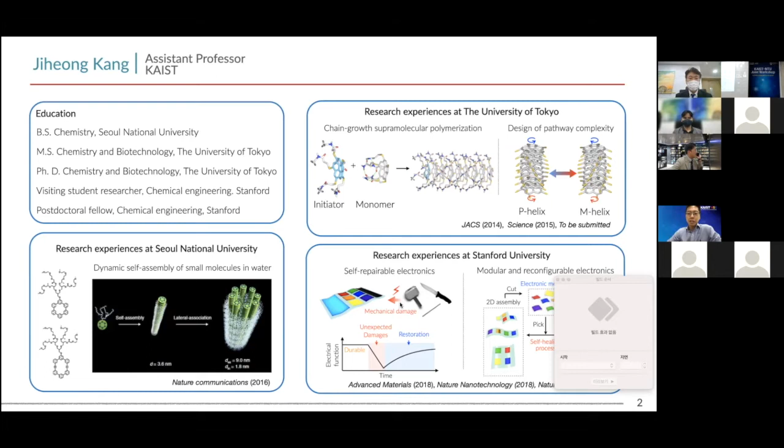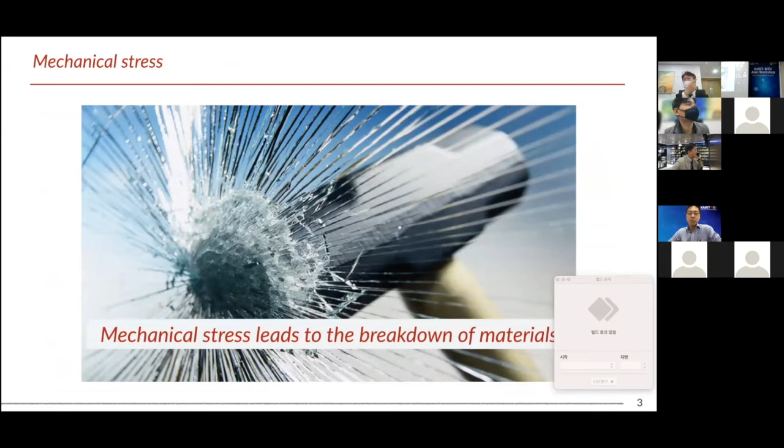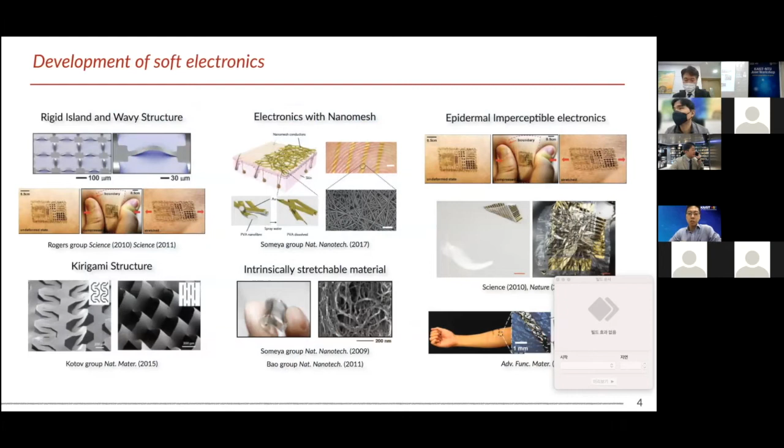Today I will focus on my work from Stanford University. My initial motivation there was how we can make materials with high resistance to mechanical stress. Basically, external mechanical stress is the origin of breakdown for materials or devices. So I was focused on soft electronics—how we can improve their durability and resistance to external mechanical stress.

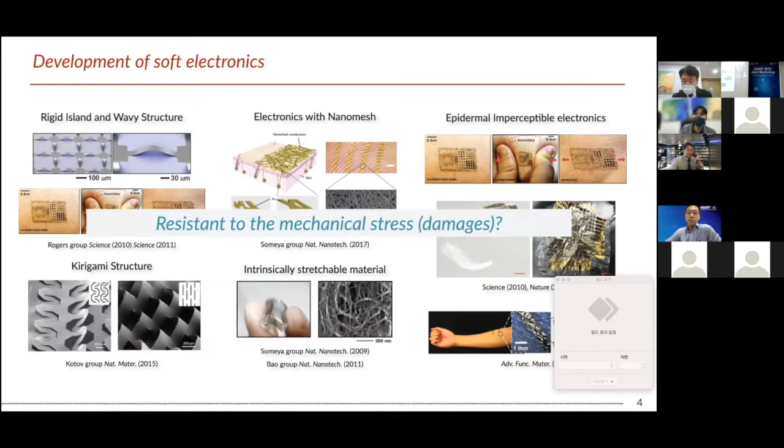There is so much work on how to develop soft electronics. However, considering their fabrication and approach, we cannot believe they can have high resistance to external mechanical stress. My motivation is how we can manage mechanical stress from external stimuli, so I wanted to develop self-healing materials to improve the durability and long-term stability of stretchable electronics.

Today my talk will focus on three topics. First is how we can fabricate self-healing elastomers, second is how we can fabricate self-healing conductive materials, and third is how we can apply these materials as interface materials for new opportunities in stretchable electronics.

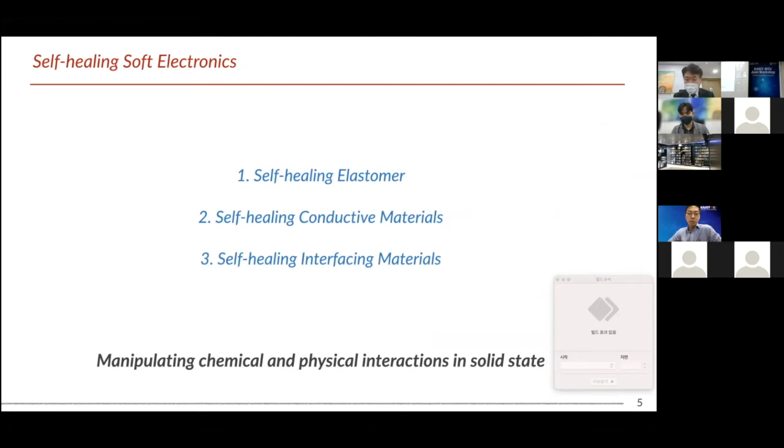So the first topic is the self-healing elastomer. First I would like to explain what self-healing materials are and what the challenge points are in self-healing materials.

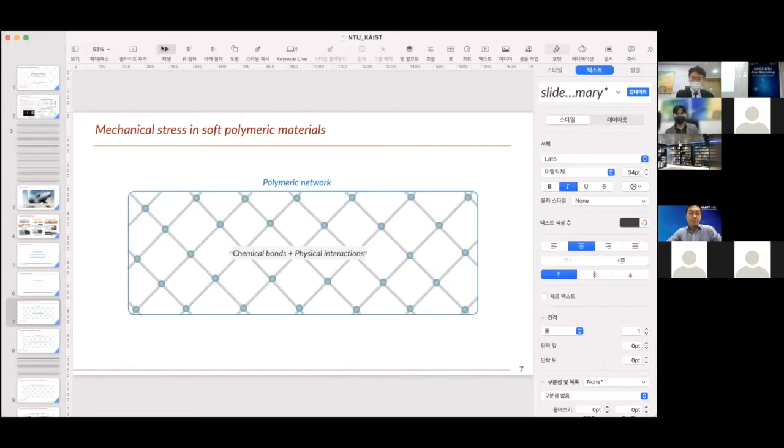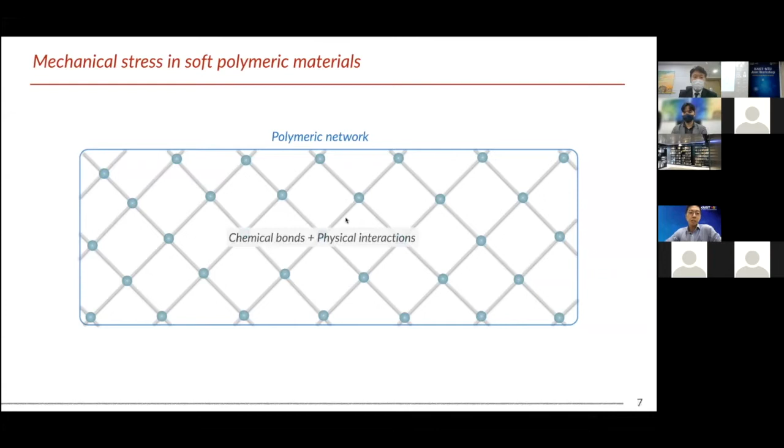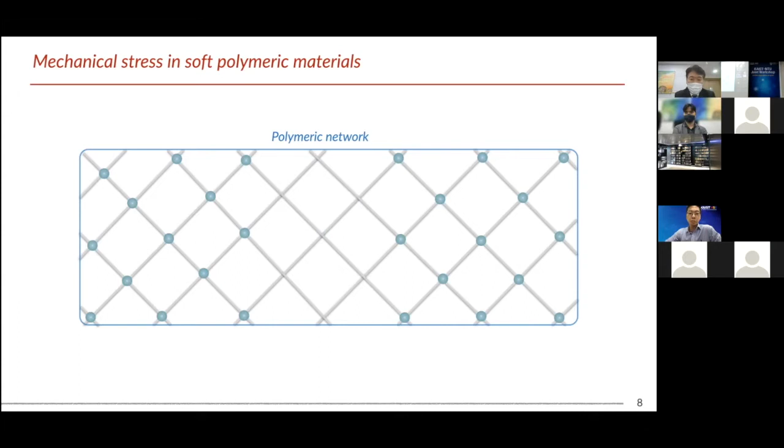Here is the most simplified polymer network for an elastomer. There's a flexible polymer chain, cross-linked by chemical bonds or physical interactions. If we apply mechanical stimuli or extreme stress, some bonds break or physical interactions are suppressed, and the material loses mechanical strength. In contrast, in a self-healing polymer network, even though we apply mechanical stress and some bonds break, they autonomously reform and can restore their mechanical properties. This is the basic principle of the self-healable polymer network.

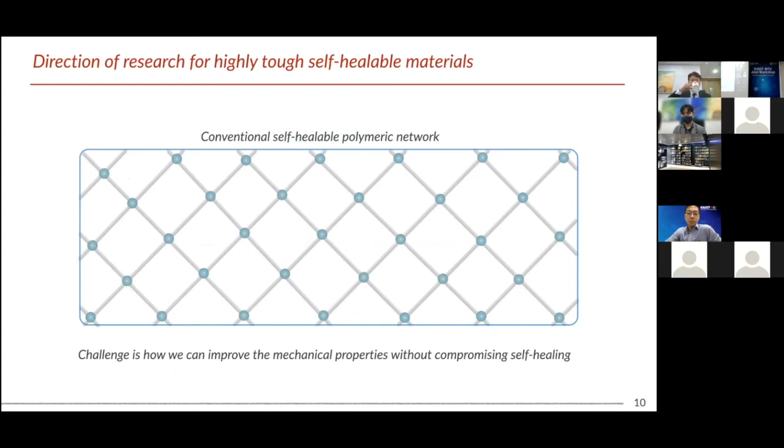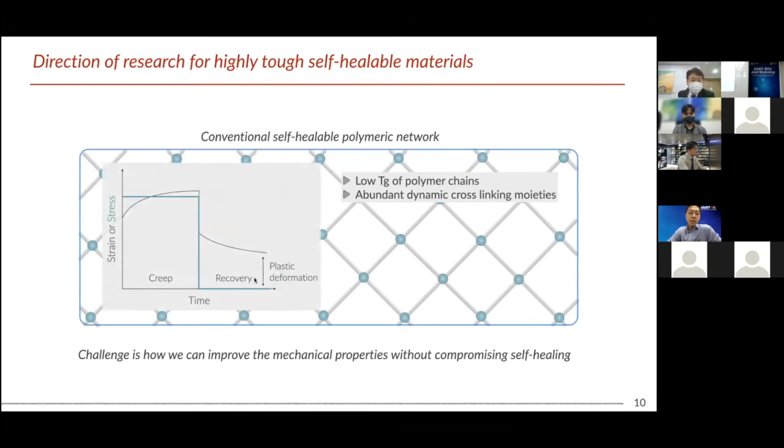However, the difficulty with self-healing materials is their poor mechanical properties, because they are based on a very low Tg polymer chain and rely solely on dynamic bonds. They conventionally show significant creep and plastic deformation under high strain. Simply speaking, they behave more like a gum rather than a fully elastic elastomer. We need to overcome this to apply them to stretchable or soft electronics.

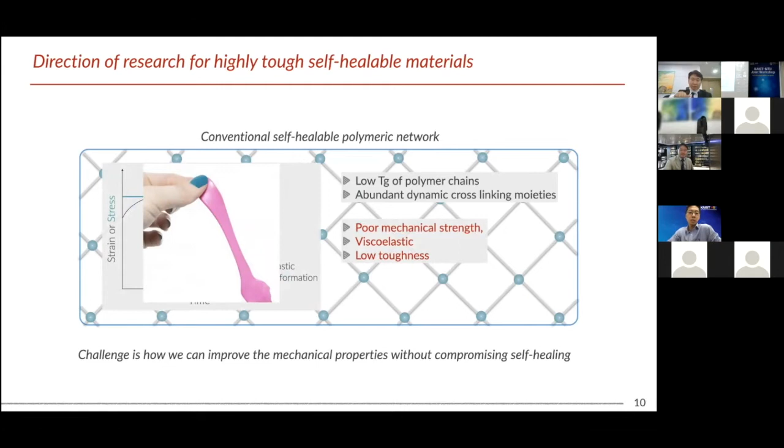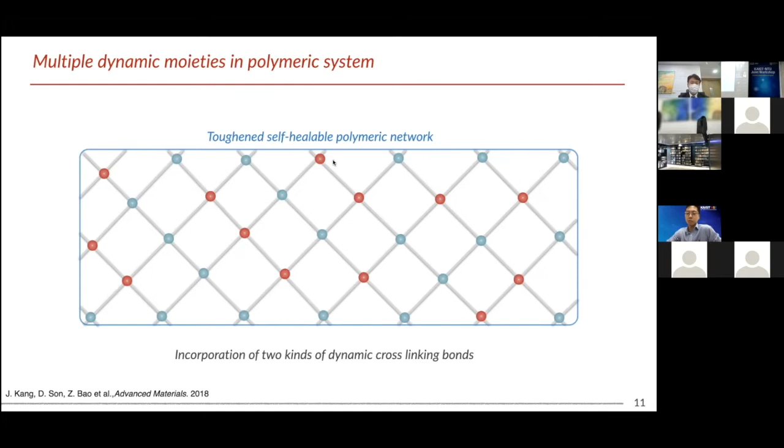My approach is quite simple. I imagined that if we could incorporate two kinds of bonds with different mechanical bond strengths, they could play independent roles—one a very strong bond to impart elasticity, and the other a weak bond providing fast energy dissipation to promote self-healing properties.

There are many dynamic bond systems for self-healing, but I mainly focused on hydrogen-bonding-based self-healing systems because they are simpler and allow easy synthesis of various types of molecules.

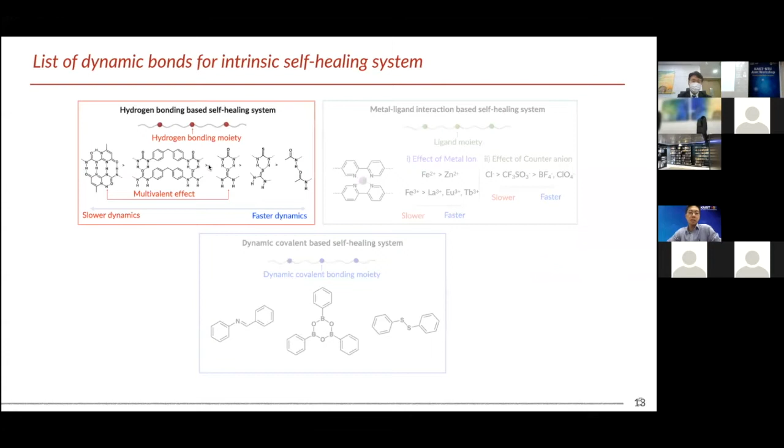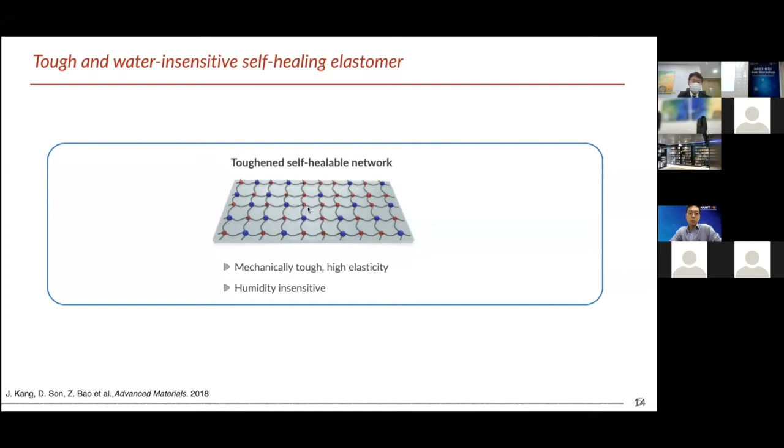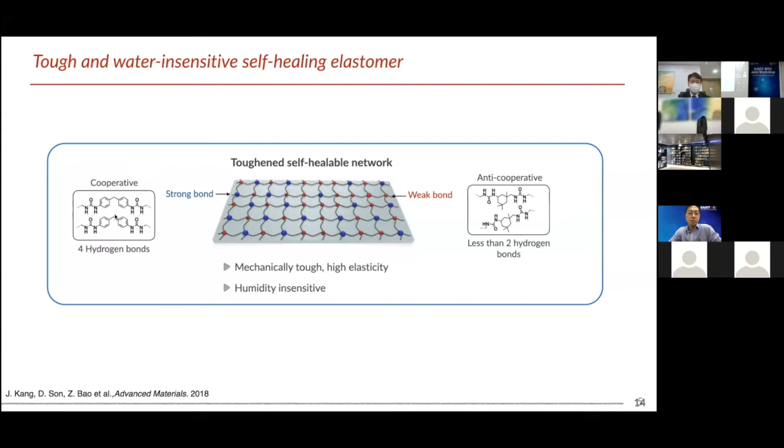My supramolecular self-healable polymer network is composed of two bonds: one strong and one weak. These bonds show very similar molecular structures—they both have two urea groups at the end, but differ in the center part of the molecular structure. The polymer design is based on a flexible PDMS polymer chain to impart low Tg, flexibility, and stretchability.

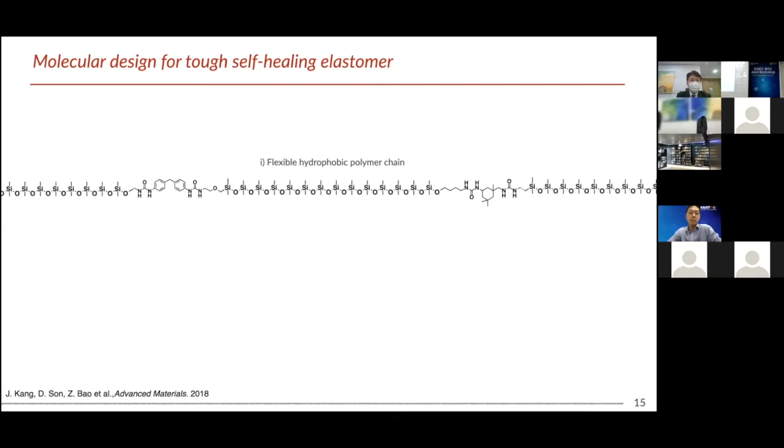So this is the first hydrogen unit here, with two urea groups. Because of their symmetric structure and the rigid structure of this center part, they can form four hydrogen bonds at the same time in a very cooperative manner.

On the other hand, this isophorone unit, because of its flipping effect and the steric hindrance of the methyl group, cannot form four hydrogen bonds at the same time. It follows more of an anti-cooperative hydrogen bonding interaction. Because of this different behavior in forming hydrogen bonds, they show very different bond strengths. Due to the multivalent effect, their bond strength differs by more than four times.

So then how can we imagine how they form such networks? In order to prove their structure, we performed NMR experiments and viscosity measurements. Actually, to make the film, first we need to dissolve the polymer in the solvent. At low concentration, they should be highly dispersed, with no particular physical interaction between polymer chains.

But we found that at a certain concentration, only the strong bond starts to form, while the weak bond remains highly dispersed. Based on this pre-crystalline structure, after full evaporation of the solvent, they eventually form a very interesting self-healable network with two kinds of bonds.

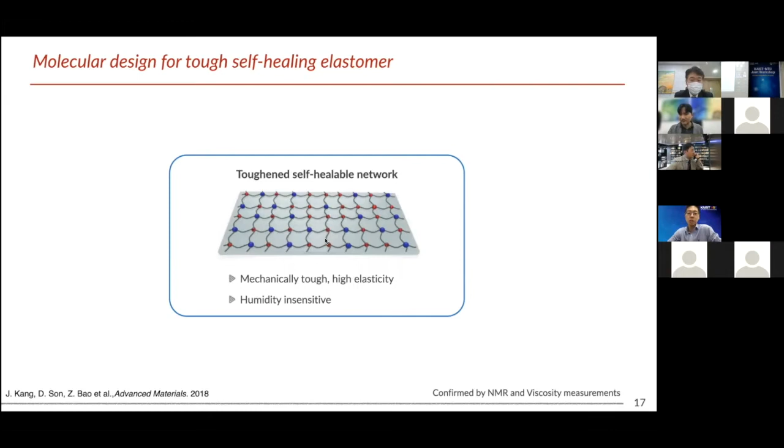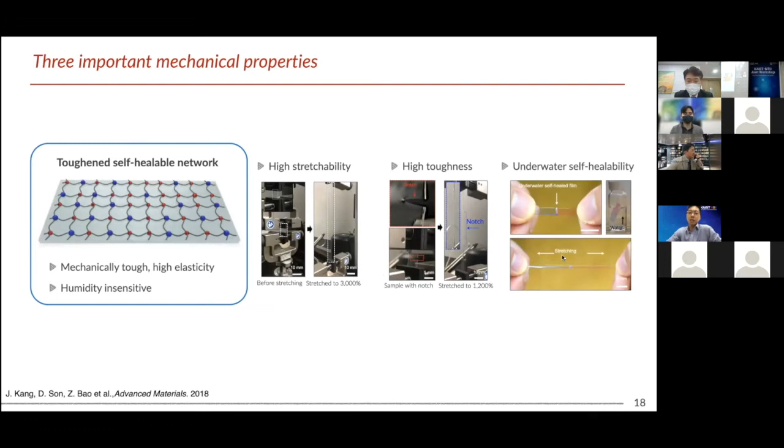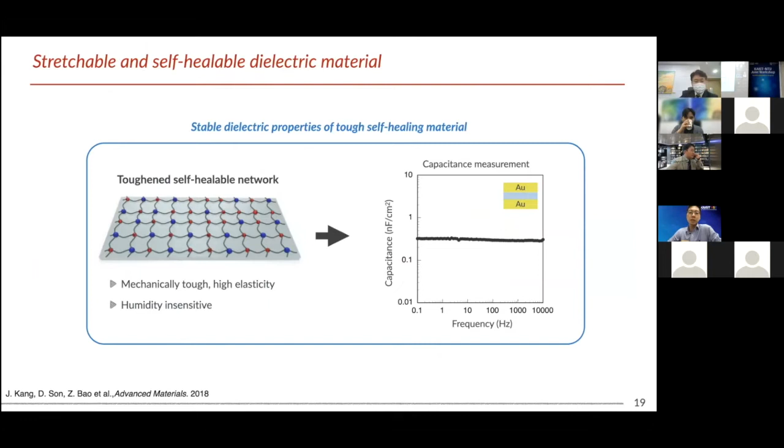This robust material also shows very nice dielectric properties, so they are ready for application in some electronic applications. Also, because of their fracture toughness, it is a very good carrier material for bioimplanted applications.

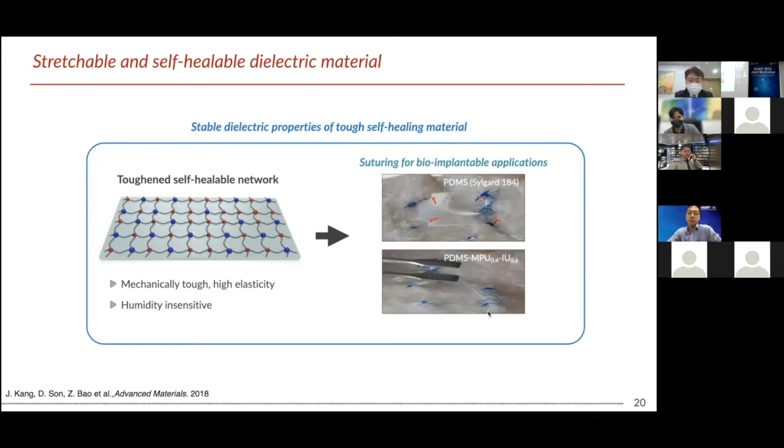If you want to implant electronic devices into tissue, it is inevitable to perform a suturing process. Most PDMS materials, because of low fracture toughness, break during suturing. However, due to the very nice fracture toughness of our materials, even under very harsh suturing processes, they can maintain their structure and keep nice mechanical properties.

So this is a summary of the first topic. I showed how we can toughen a conventional self-healable polymer network and achieve very nice mechanical properties.

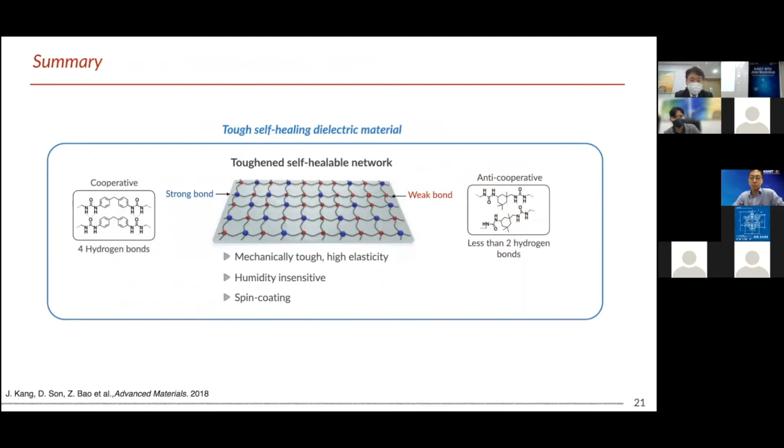Let me move to the second part. Before that, I would like to show some of our recent advances in self-healing materials. As you may know, most self-healing materials are based on non-covalent bonds, so they show very poor thermal stability.

But we found that if we can promote the self-assembly of such dynamic bonds, we can dramatically improve the temperature stability. Even with the same molecular design, by tuning the overall length of the polymer, we found we can promote fiber structure in the polymer film with dynamic bonds.

We found that even at 100 degrees Celsius, a relatively high temperature, this nanostructure can still be maintained and shows really nice mechanical properties.

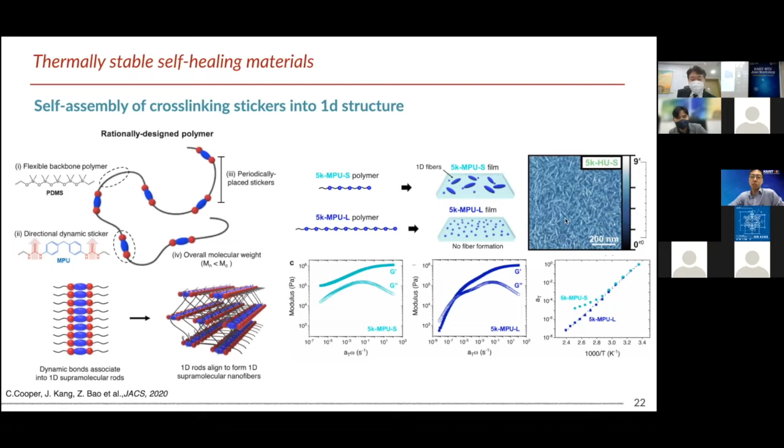So this is the fiber structure shown by AFM. As you can see, these dynamic cross-linkers start to form a very nice 1D structure and dramatically change their mechanical behaviors. We also recently developed a very nice actuator based on this supramolecular polymerization method.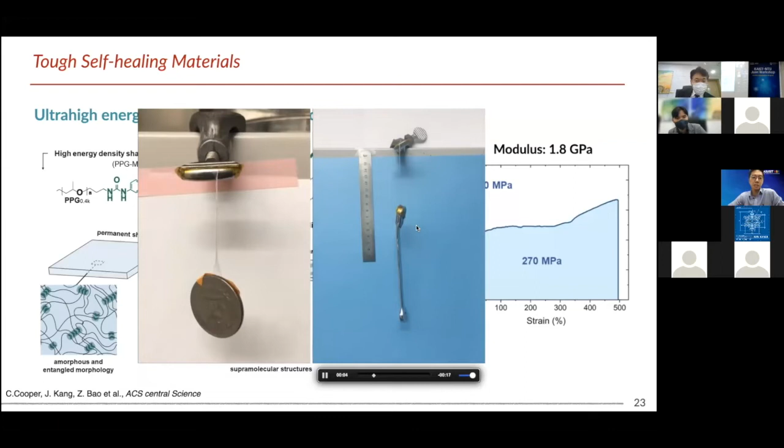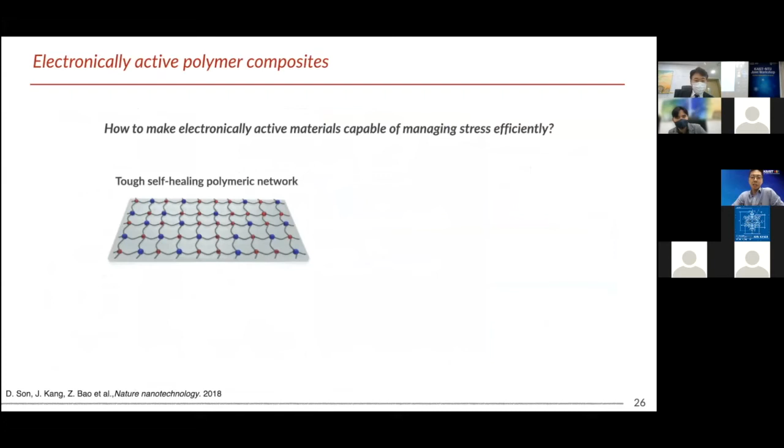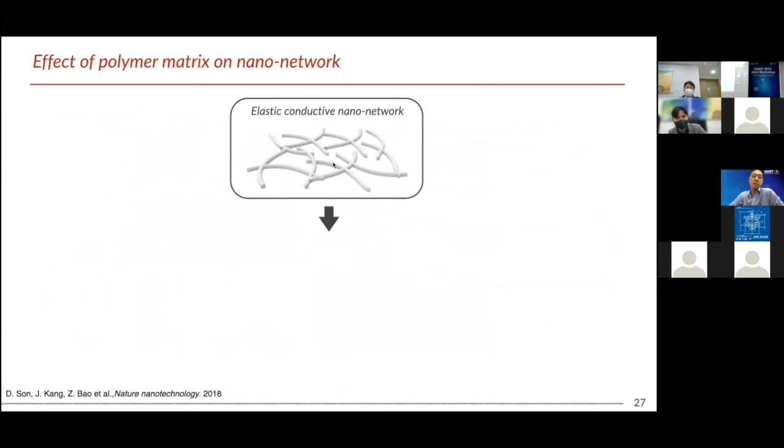So now I would like to move to the second part, about how we can make self-healing conductive materials. Basically, the easiest way to make a conductive material is to add a conductive component into the polymer matrix. Our initial motivation was curiosity about whether embedding this kind of 1D nanowire-based conductive nano network would change its behavior depending on the embedding polymer matrix.

We embedded this CNT or silver nanowire-based nano network into a fully cross-linked elastomer, a self-healable polymer matrix, and also a gum-like polymer matrix. We found, to our big surprise, that upon embedding this nano network into the self-healable polymer matrix...

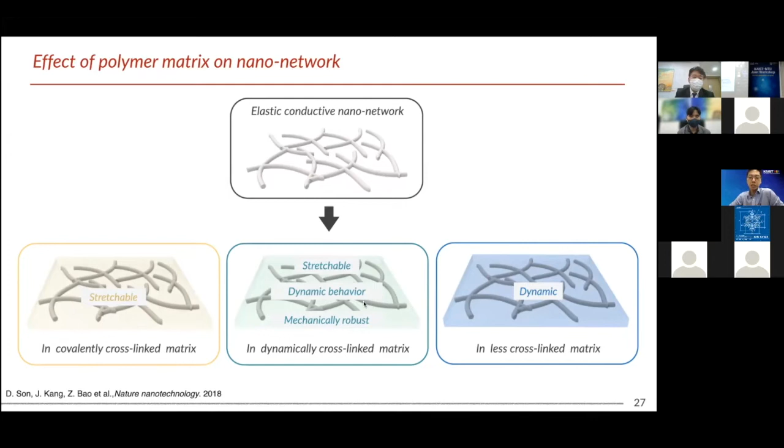...this nano network also started to have very dynamic properties, reconstructing itself under mechanical stress. So here's a video: we prepare the electrode and start to scratch it with a razor blade.

Initially, if you scratch with a very low power, there's no change in light intensity. So we start to increase the power of the scratch to fully damage the surface. At this moment it's very unstable, but they start to restore their bright intensity, meaning that they can reconstruct their network and restore the electrical properties.

To fully investigate what's happening here, we perform a more quantitative analysis. We measure the forces of the scratching, increasing up to 4 Newton.

After removing the razor blade, you can see the very rapid recovery of resistance at this first step. This is more related to the physical contact between the damaged surfaces. But more importantly, over time you can see a significant resistance decrease, meaning that they continuously reconstruct their nano network and restore their electrical properties.

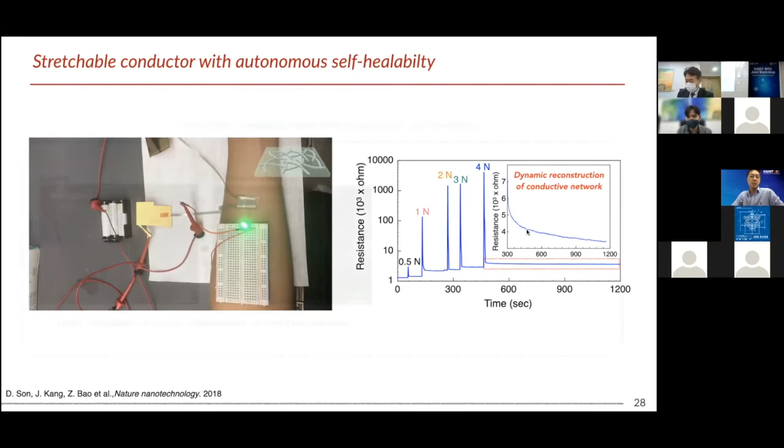To visualize what's happening here, we perform SEM measurement. Upon damage, initially because of their insulating properties, we couldn't visualize the nano network in this damaged area. But after 12 hours they start to reform the whole of the network and become very conductive. Then we start to visualize this damaged interface, meaning that they truly dynamically reconstruct their network over time.

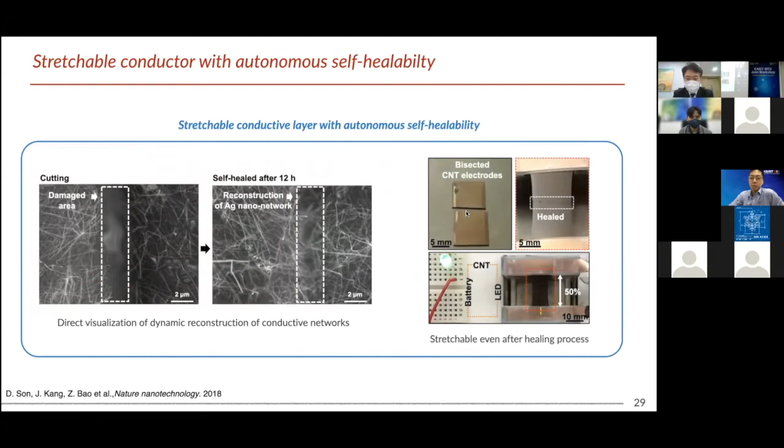And in order to confirm their mechanical healing, we fully cut the electrode and put it together. After 3 hours, we found that upon stretching, they can still maintain their mechanical properties and also their electrical properties as well.

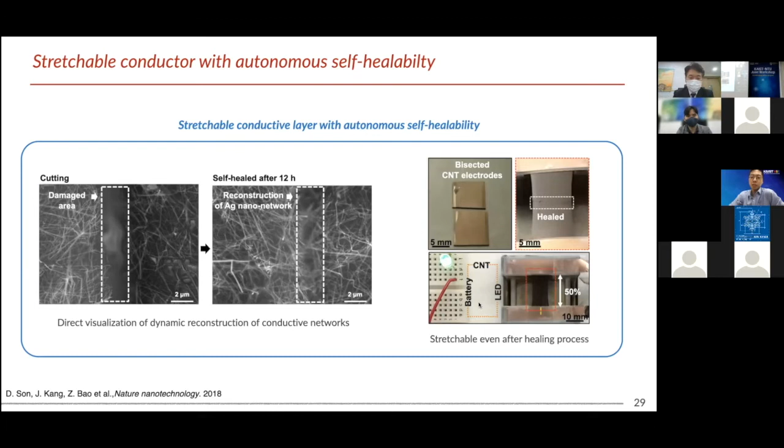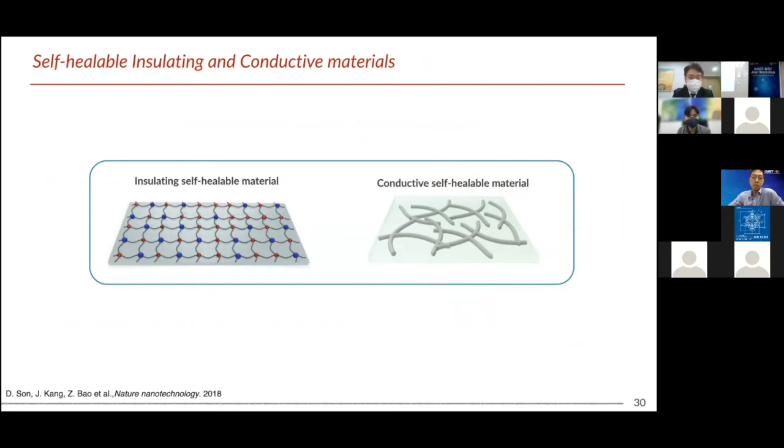So now we have a very nice insulating layer and also very nice conductive materials. And because of their mechanical robustness, we are able to fabricate this kind of integrated self-healable electronic skin with multifunctionalities.

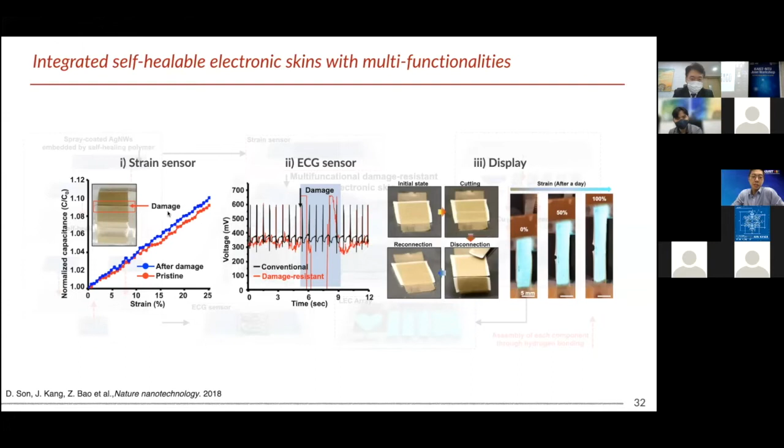They are composed of a strain sensor, an ECG sensor, and a display. All of the components are a fully self-healable system. So even after damage, they can restore the sensing ability and also their light emitting properties.

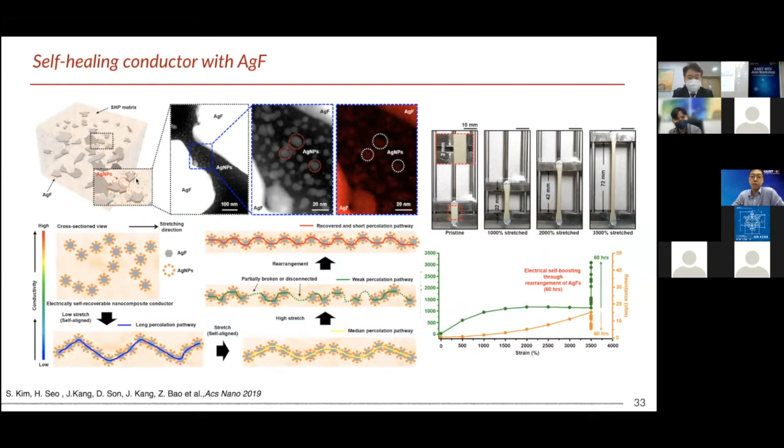This approach is not limited to 1D nano networks, so it can also apply to 2D systems. Even with silver flake systems, they show very dynamic behavior. We found a very interesting electrical self-boosting event inside the polymer matrix.

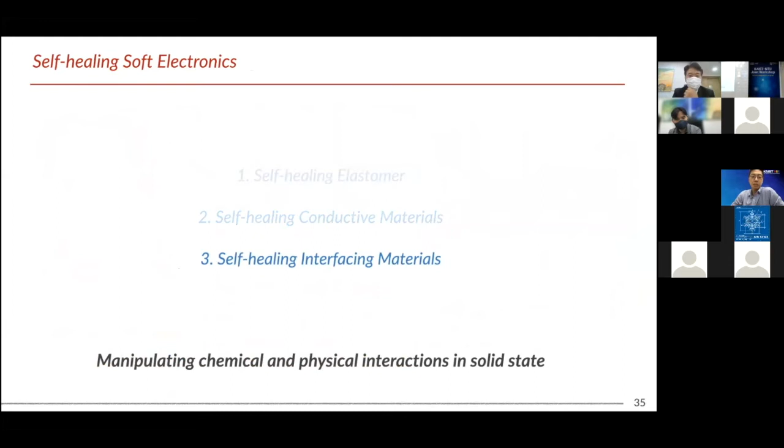Now I'd like to move to the last part, about how we can use self-healing materials in stretchable electronics as the interface materials.

Initially, my starting point is to make a stretchable semiconductor. Most semiconducting materials are quite brittle, even organic materials. Conjugated polymers have received great attention for stretchable semiconductors because of their semi-crystalline behaviors. But even with conjugated polymers, they easily show micro crack formation at 20% strain.

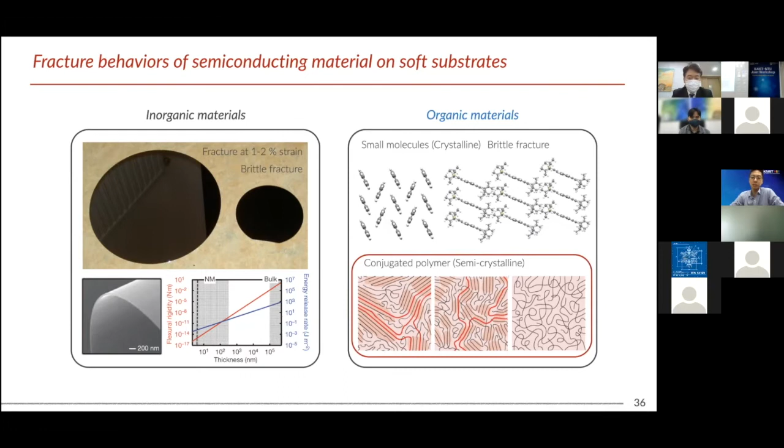So I would like to improve the stretchability of conjugated polymers in a different way. If you look at the fracture mechanics of polymer thin films, we need to consider two situations: one is a freestanding thin film, and the other is a thin film on an elastic substrate. In the case of the freestanding thin film, because of some stress localization effect, they easily form fracture at a very small strain.

But on the elastic substrate, the substrate can retard the stress localization effect. Somehow they can avoid complete fracture; instead, they form this kind of micro crack formation.

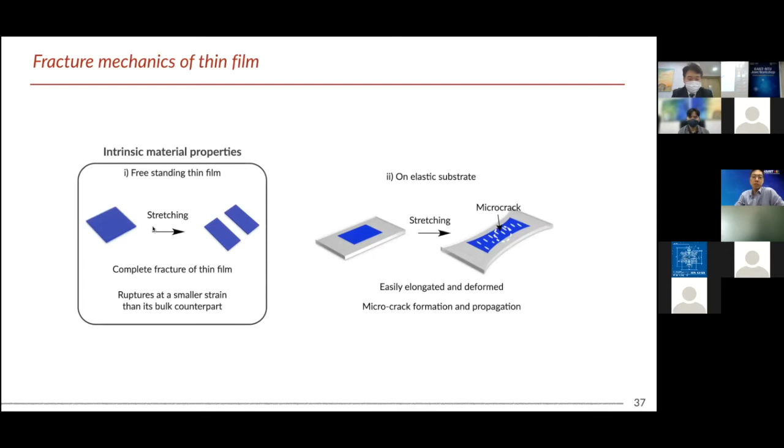In the freestanding situation, the behavior is more related to intrinsic material properties. However, on the elastic substrate, we need to consider the interface properties as well, so we need to consider both the material parameter and the interface parameter. However, most studies so far are more related to material properties engineering—by incorporating elastomer matrices, introducing conjugation breakers, introducing hydrogen bonding conjugation breakers, or making nano confinement effects inside the polymer matrix, they dramatically improve the stretchability of semiconducting materials.

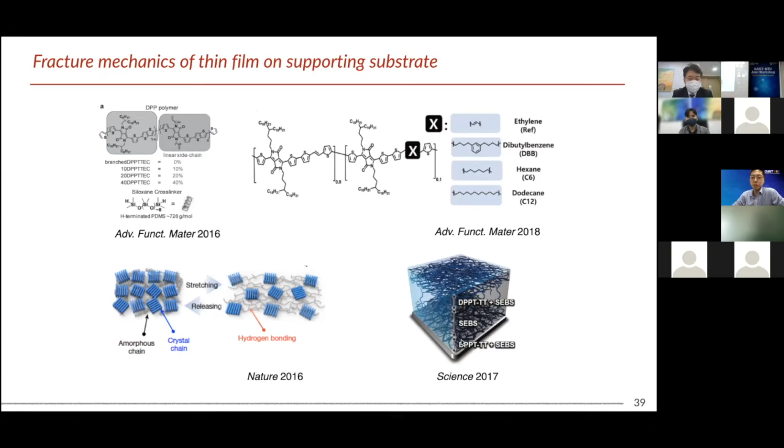However, so far there's no report about how we can engineer the interface and how it can affect the fracture mechanics behavior of semiconductor polymer thin films. So I focused on how we can improve the interface parameter in the stretchable electronic system and see how it can change the fracture mechanic behavior of the semiconductor polymer film.

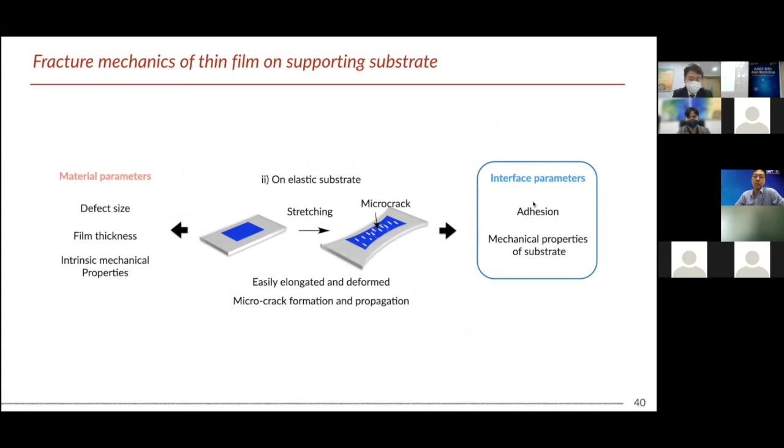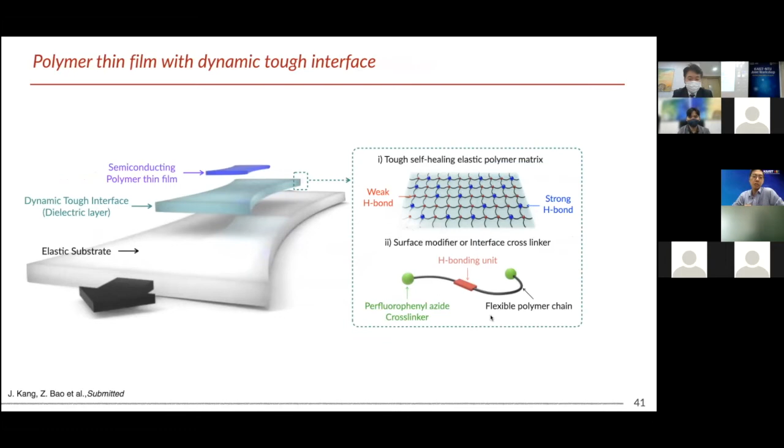Here's a scheme where I make the interface very tough, with self-healable properties. Basically, I synthesized a new interface material composed of two components: one is a self-healable polymer matrix, and the other is an interface cross-linker to promote nice cross-linking between the two different polymer surfaces.

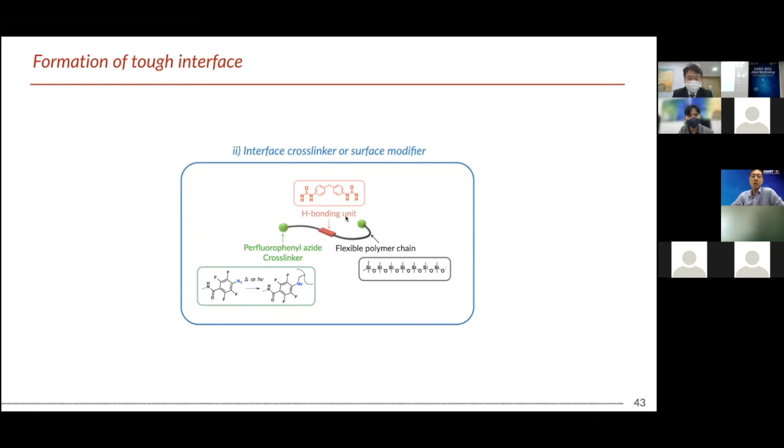So one is a self-healing polymeric material, and the other one is based on the perfluorophenyl azide cross-linker base. They have two cross-linkers to create cross-linking between the two surfaces, and also hydrogen bonding units to promote nice topological interaction with the self-healable polymeric material. This is the basic principle for evolution of a tough interface like this.

If a polymer film has different surface properties, they cannot be entangled and they try to separate, showing very poor adhesion. So my principle is, in order to make topological adhesion between the two surfaces, just modify the polymer film with certain non-covalent interactions.

Based on the surface modifier, I fully change the surface properties of the polymer film, and these modified surface properties become identical to the secondary self-healing polymeric material. Because of the very nice hydrogen bonding interaction, the secondary polymers start to stitch into this surface and induce this nice bilayer structure with a tough interface.

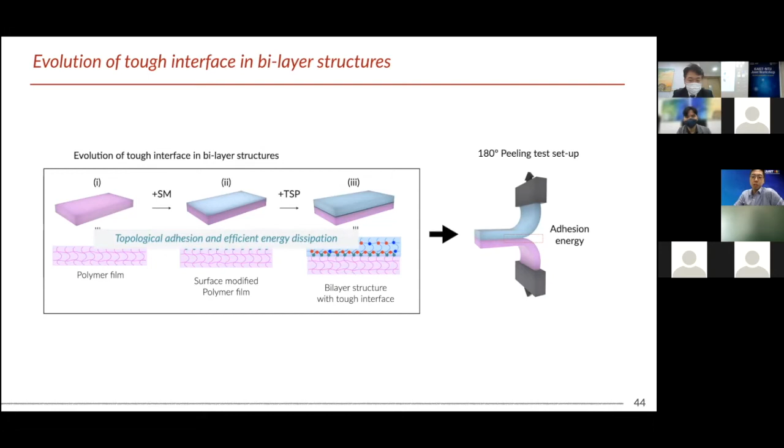So the basic principle is topological adhesion and also efficient energy dissipation by the self-healing polymeric material. This way we can make a really nice tough interface between various polymer surfaces.

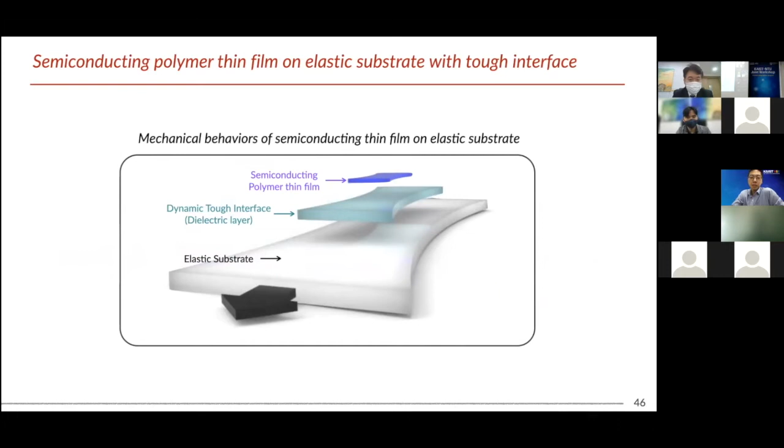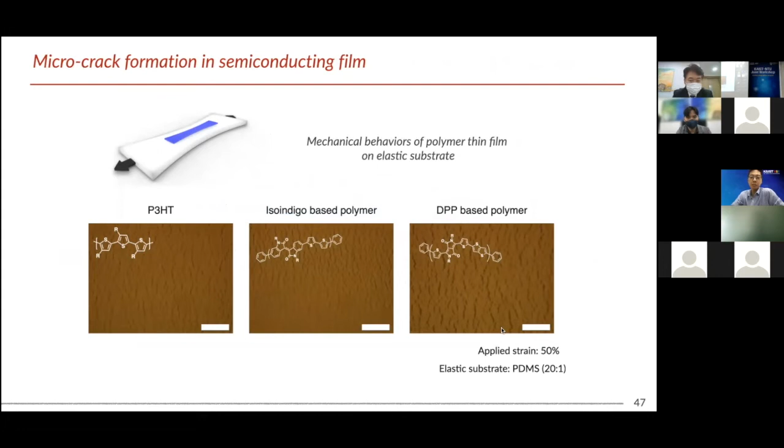Based on that, we started to look at how this interface can modulate the fracture mechanics of the polymer thin film, so we tried with various kinds of semiconducting materials. If you simply laminate various semiconducting polymers onto a PDMS substrate, at 50% strain there is a lot of microcrack formation.

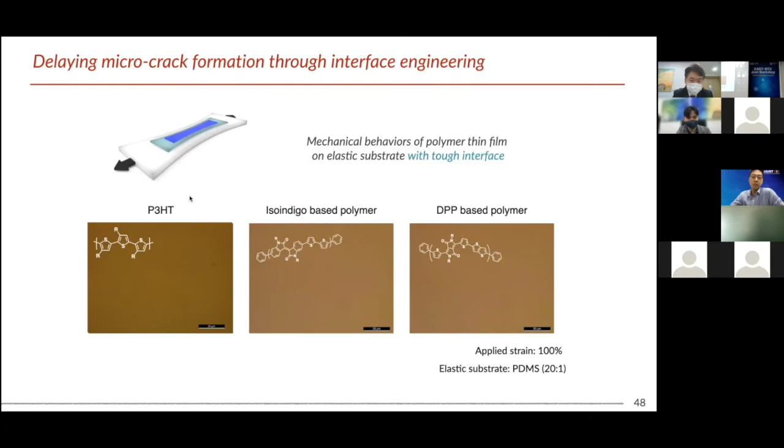But surprisingly, we found that when we introduce the tough interface, they show no crack formation even at 100% strain. This means our tough interface can dramatically delay crack initiation and crack propagation in the semiconductor polymer film. The mechanism is like this.

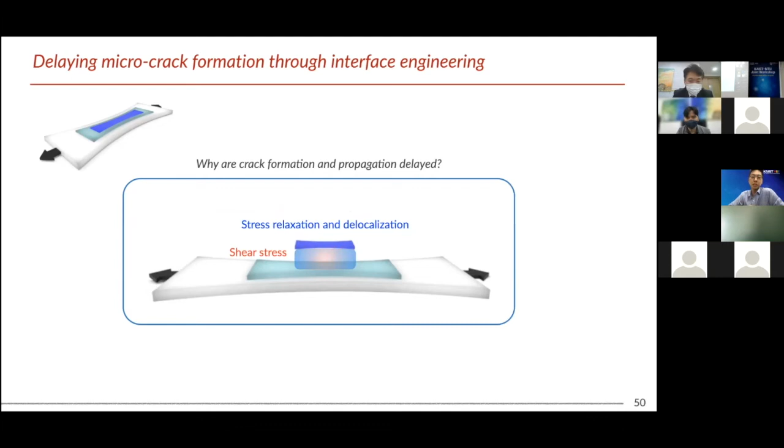Initially, if you apply tensile strain, there's generation of shear stress like this, and this shear stress becomes localized at defects in the interface between the semiconductor film and the substrate. However, if you have a very tough interface, we can avoid the delamination issue and also relax this shear stress, so we can avoid crack formation and propagation by this mechanism.

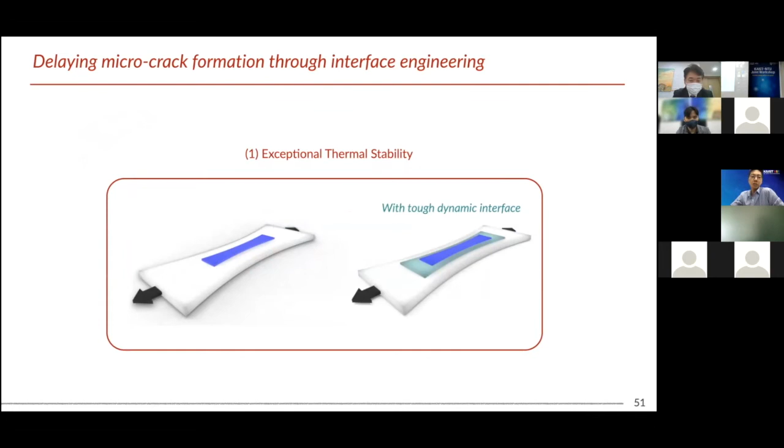Based on this tough interface, we found two important features. The first is exceptional thermal stability. Basically, if you have two layers with different thermal expansion coefficients, at high temperature they start to create more defects at the interface.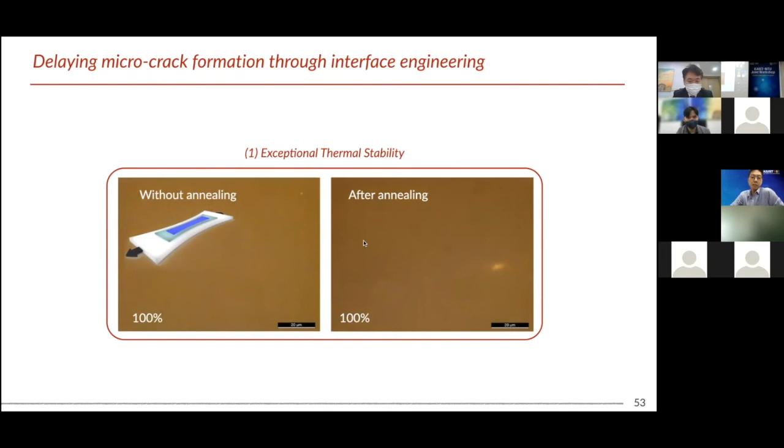This is at room temperature. After heating to 100 degrees C and cooling down, you can see a significant increase in crack density, meaning the interface gets worse and worse. However, with our interface, because of the very nice dynamic nature of the material, we see very nice thermal stability—no change, no crack formation.

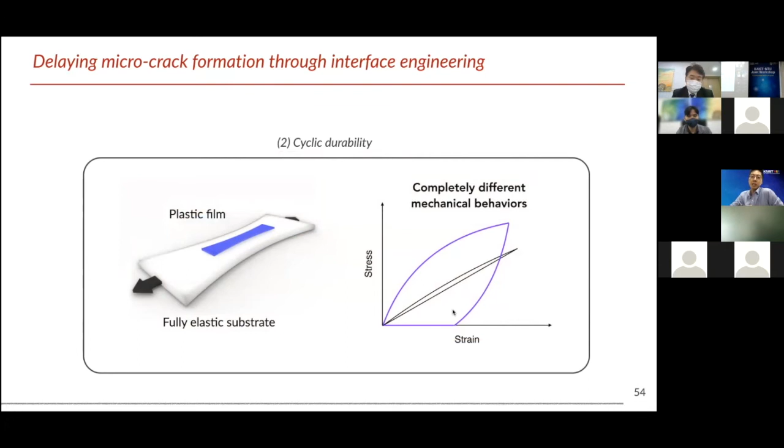The second feature is cyclic durability. If you have a plastic film as the semiconductor and an elastomer as the substrate, they have very different cyclic mechanical behaviors, so during cyclic testing we see instability.

This is the first cycle. After 100% strain with 50 cycles, you can see merging of many cracks, meaning that because of the difference in cyclic mechanical behaviors, it affects their cyclic durability.

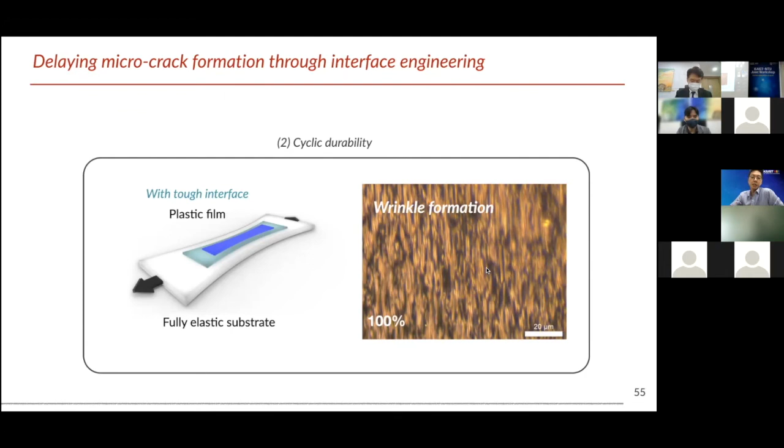However, with our interface, they have adaptive properties, so they can compensate for the different residual strain issue by intrinsically forming this kind of wrinkle formation. Based on the wrinkle formation, they can stabilize the system, so we can improve their cyclic durability.

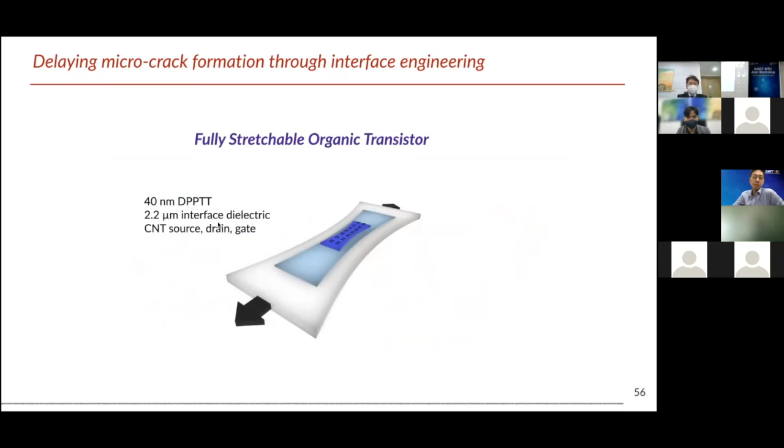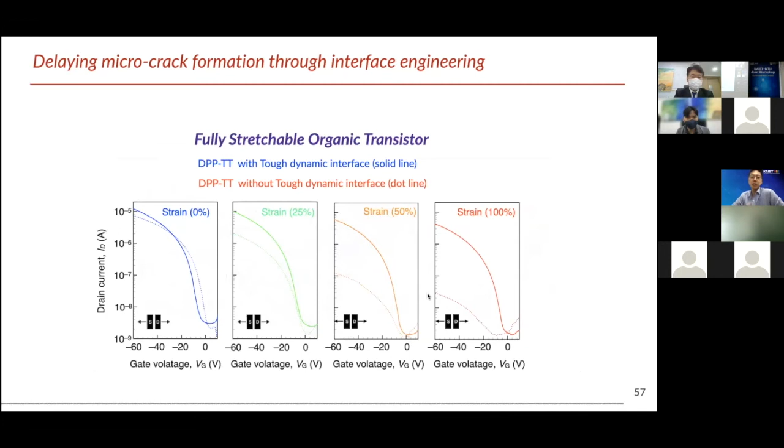Based on this material, we were able to fabricate a fully stretchable organic transistor using our interface as a dielectric. With this approach, you can see up to 100% strain a very nice transfer curve. But without the tough interface, you can see a significant drop in current level because of crack formation.

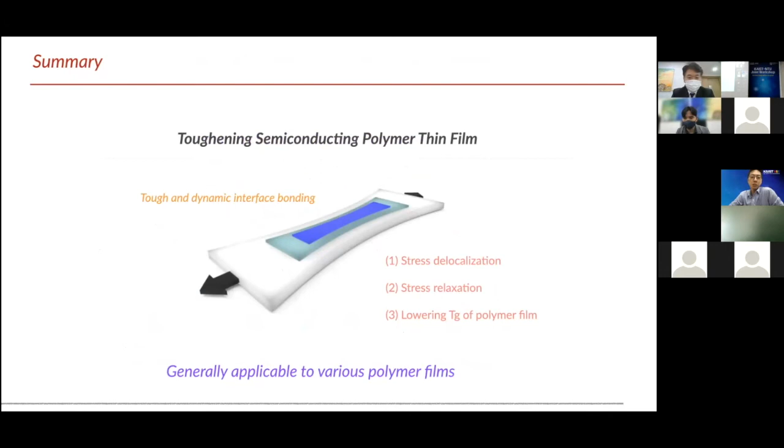Meaning our approach is quite useful for fabricating stretchable organic devices. And actually our approach is quite general, so it can apply to various polymer films, even PEDOT:PSS and also some gold layers. This is maybe a new paradigm shift in the engineering of stretchable electronics.

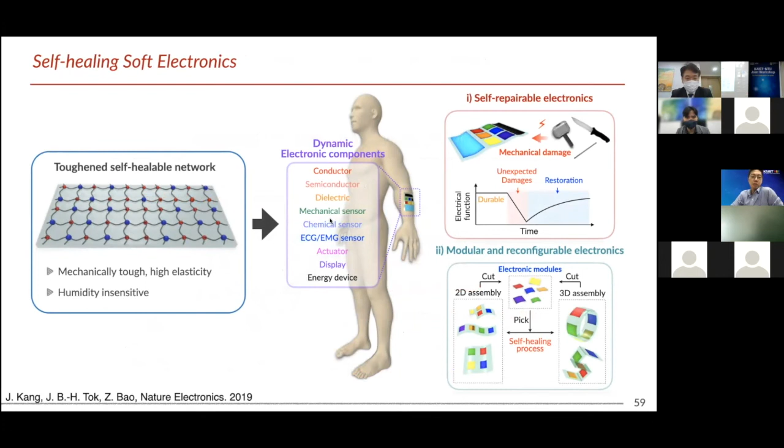So far I developed some new self-healing soft materials and applied them to stretchable electronics as a conductor, semiconductor, or sensor. But after coming to KAIST, I started to make a new generation of self-healing soft electronics, because the current generation of self-healing materials still has a lot of problems in terms of mechanical properties and also electrical properties.

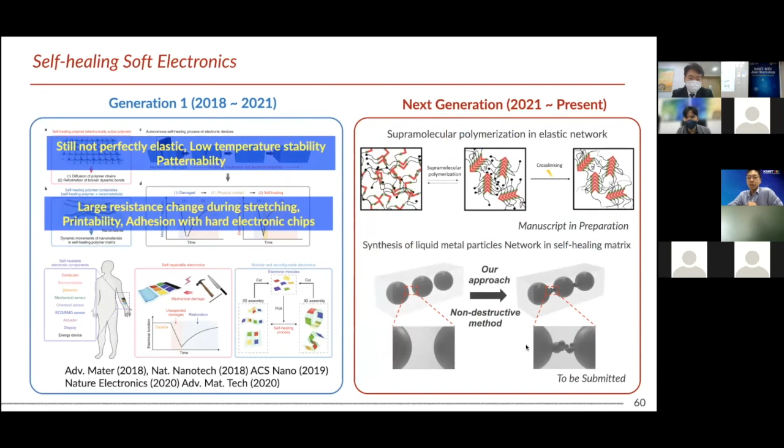So recently we found a very interesting behavior in the elastomer and also some conductor. Concerning time limitation, I will just briefly mention our recent advance in the liquid metal particles network. Basically, we're trying to make a purely liquid metal based stretchable conductor because of their extreme deformability. But actually, because of liquid behavior, it's difficult to apply to stretchable PCB or stretchable electronics.

But recently, we found a very interesting synthetic method. By making some nanoparticles, the liquid metal particles in between the pristine liquid metal particles, just bridge them. We call this a liquid metal particle network.

Conventionally, if you mix the liquid metal particle in the polymer matrix, you can see because of surface tension, they couldn't form a percolation network. So in order to make the percolation, we need to apply mechanical stress to break the rupture of some liquid metal particle and leak the liquid metals.

But we found that if we make some new liquid metal particles in between these two particles, we can make a very nice percolation pathway with very high electrical conductivity.

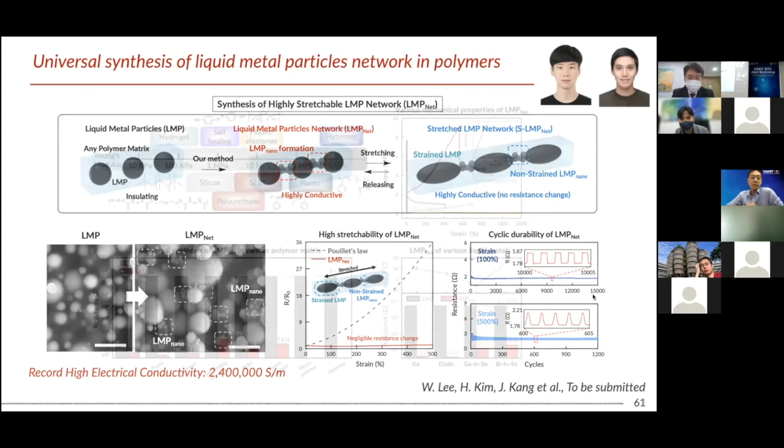And this resultant network showed really negligible resistance change up to 500% strain, and also showed very nice cyclic durability, more than 1,000 or 15,000 cycles. And this method is quite general, not only applied to a particular polymer matrix - we can apply this synthesis into silicon elastomer, SEBS, polyurethane, even in hydrogel, or even in very hard epoxy systems.

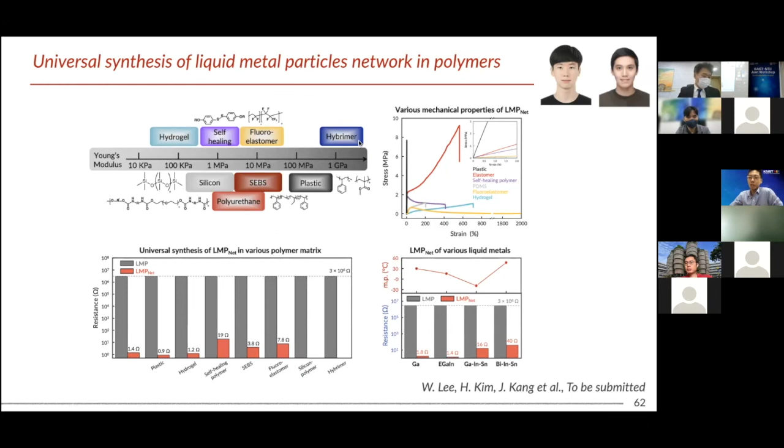Based on this, we fabricate a very nice conductive line with very nice adhesion with the electronic chip. This allows us to make really multi-layer, stretchable, and also self-healable printed circuit boards with very high density. So this is the end of my talk.

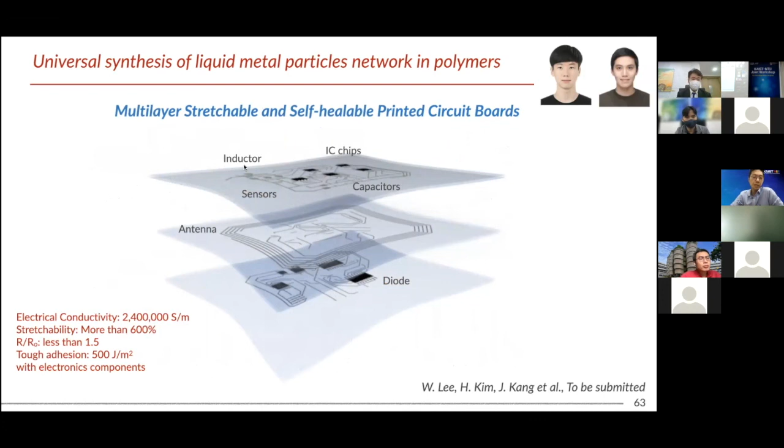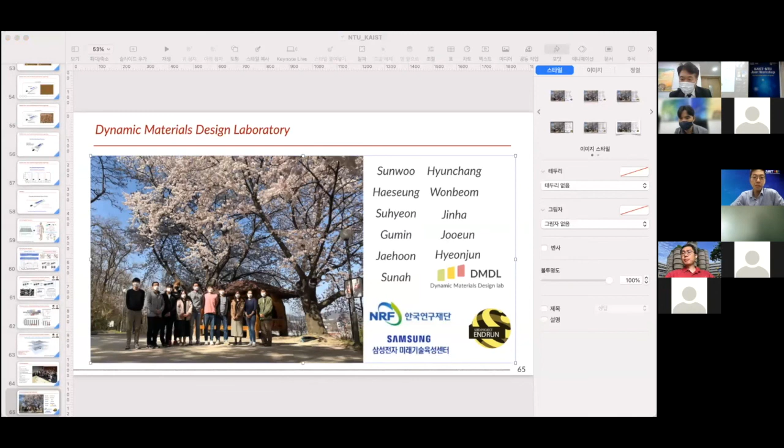Actually, there is one question from Mr. Hyun-Sung Kim. Can you see the question? Just a moment. Yeah, I can see the question. Yeah, maybe we can have one or two questions.

So the first question is: is it impossible or thermodynamically unfavorable that hydrogen bond unit 1 makes a bond with hydrogen bond unit 2? Basically, in principle, hydrogen bonding unit 1 also can form hydrogen bonding with unit 2. It is a kind of self-sorting event - even though we mix them, the 1-to-1 interaction is much stronger. So they have some recognition to form the hydrogen bond. So even though we mix them, they can separately find their partner. So this is the answer for the first question.

And the second question is, how can we confirm that hydrogen bonding is made or not? Basically, based on FTIR, we can confirm the hydrogen bonding, because upon formation of hydrogen bond, there is a clear shift in the NH vibration or the CO vibration.

The final question is, do semiconducting polymers have thermally activated behavior like other semiconductors such as silicon? It's very different. Organic semiconductive polymers are more related to the hopping mechanism, so they're much better at high temperature. It's a very different behavior.